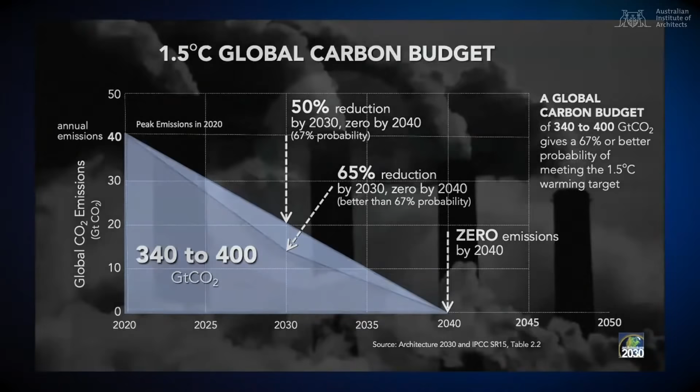And if we want to do even better, we think our sector can do better. Our sector should meet a 65% reduction by 2030 and then phase out all CO2 emissions by 2040. We can do that in the built environment. So how difficult is it to do that? Well, we're calling on all architects, planners, engineers, building sector professionals, industries associated with the building sector and the built environment to design to zero carbon now, not wait.

These are the 3 steps that we can take to get to zero carbon. Step 1, design to the latest code standards or better. We have great codes out there. No matter what code your city or state or country has in place, if it's not up to the latest code standards, it doesn't prevent you from designing to the latest code standards. The code only sets a minimum standard, so you can design to the latest code standard. We'll go over that in a minute.

2, no on-site fossil fuels, design all electrical, and then use renewables for that electricity. And then 3, zero out embodied carbon, specify materials for your building and construction that don't emit carbon. So those are the 3 steps. Let's look at each one individually. First, design to the latest code standards or better.

Again, 100,000 square foot office building. You can see that the latest code standards are so efficient now that we reduce our energy consumption and our emissions in most building types anywhere from 50 to 60, 70%, or even in some cases 80%, if we're using the latest code standards. So this is ASHRAE 90.1 2019, designing to that code standard, and the 2021 IECC.

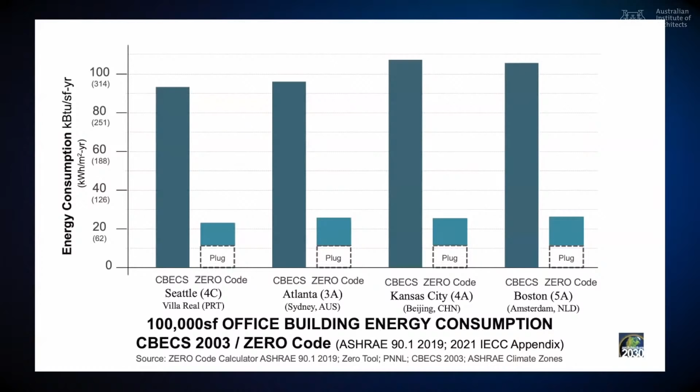And you can see that half of the load in new buildings now is the plug load. The actual code doesn't really get you much in the plug load, but reduces the energy consumption of the building as a whole, the heating, the lighting, the cooling. And you can see that's in the blue bar. There's not much left. We've squeezed as much out of those buildings roughly as we're going to get. We can get 3, 4, 5% more efficient every few years, but that's going to be about it. So our codes are really pretty good.

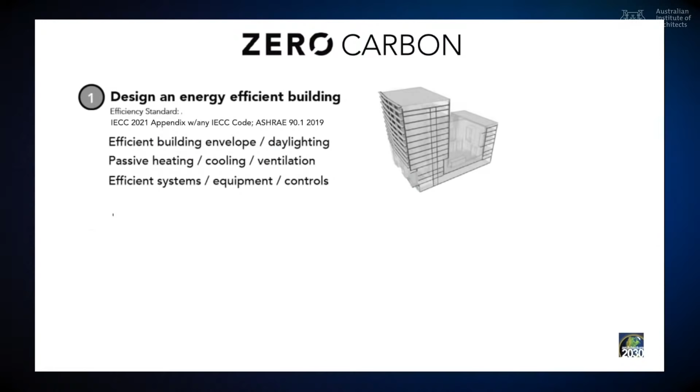So first thing we need to do, design energy efficient buildings. Use the IECC 2021, ASHRAE 90.1, or any code standard that gives you an efficient building. And then you can design beyond that. Design a better envelope, use daylighting strategies, passive heating, cooling, and ventilating, efficient systems and controls. You can get way, way down where a building's energy consumption is very, very small, and most of it then will be just the plug load.

So one was design to the latest code standards for highly efficient buildings. Two, design all electric, no on-site fossil fuels, and then produce that electricity with renewables. So how do we do that?

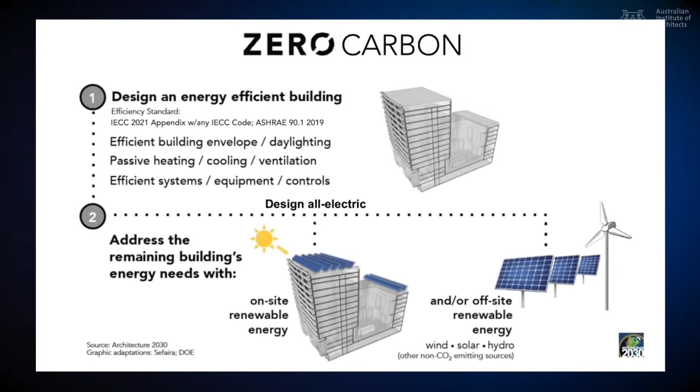One, we design all electric, and then we address the remaining building's energy needs with on-site renewables. And if we can do it on-site, then we're done. Or we do some on-site if we can, and then purchase or procure the rest with off-site new renewable energy, wind, solar, hydro, you name it. That gets us to zero carbon.

And we know, for example, that the city of Sydney is introducing a net zero emission standard, like a zero code, similar to Architecture 2030 zero code, calling for highly efficient buildings by 2023 and achieving net zero output by 2026, meaning that they're achieved through energy efficiency and then site energy generation and offsite renewable energy purchases.

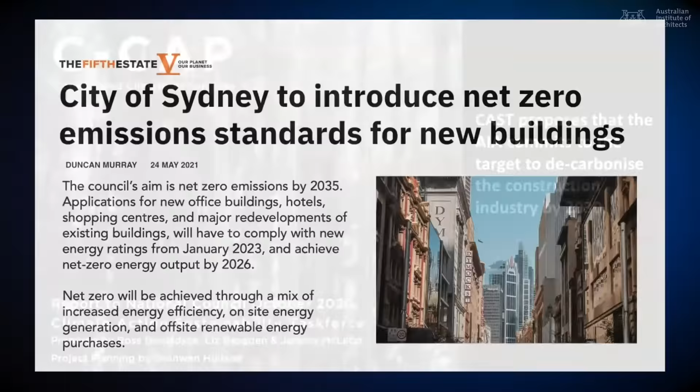And the Climate Action Sustainability Taskforce that was put together proposes that the Australian Institute of Architects commits to a target to decarbonize the entire construction industry by the year 2030. That would be great, and we can do that within our industry with or without government help. Better, obviously, with government help, but we can design to zero carbon standards now.

Well, what about all those existing buildings? That's for new buildings we just talked about. It's the same formula: efficiency, upgrade them for efficiency when you can, electrify them, get rid of the on-site fossil fuels, and then use on-site or off-site renewables to power the building.

And we've discovered something really interesting. This is an aerial view of New York City. You can see those red circles. That's where all the huge buildings, the skyscrapers, the skyline of New York, that's where it is. It's in Midtown, downtown Manhattan, and in downtown Brooklyn. That's where all the very big buildings are.

That's less than 2% of the total buildings in New York City. There's over 1 million buildings in New York, and that's only about 20,000 of them. That small number of buildings is responsible for 48% of all the building emissions in New York City. So a very few buildings are responsible for a huge portion of emissions, and then all the other million buildings are responsible for the rest.

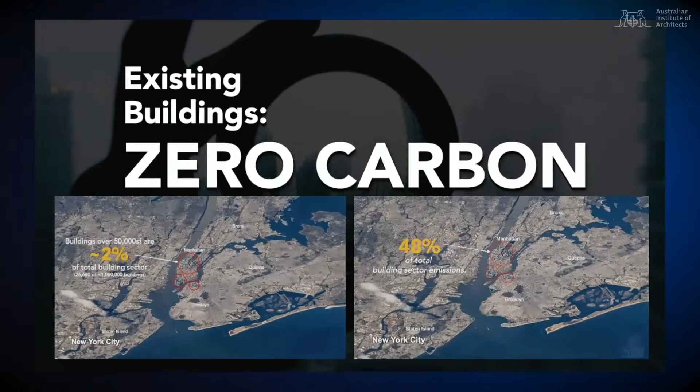So we can develop a policy. We can say, hey, if you have a big building that's responsible for roughly almost half the emissions, it's only going to be a handful of buildings, you get to zero carbon by 2030, and we'll provide some incentives for you to do that. But if you don't, then there's a penalty. Give them low interest loans, tax abatements, all sorts of things that you can do.

And then what about those thousands and millions of other small buildings? You require them to get to zero carbon by 2035 or 2040, and you use intervention points. Small buildings are sold all the time. At point of sale, the new owner coming in has financing, is usually going to renovate. Then he renovates, gets rid of the on-site fossil fuels, uses renewables, and he's at zero carbon.

Well, this is usually the way we see global emissions divvied up. Building operations, which we just talked about, is 28% of all emissions. Then industry is really the belly of the beast. That's 43%. That's all the infrastructure, buildings, substructure, equipment, systems. That's agriculture. That's your computer. That's your sunglasses. That's literally everything that's made goes into industry. And then transportation is 23%.

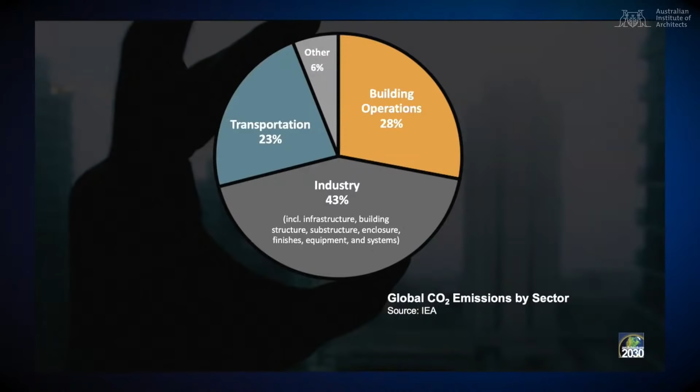So how do we get a handle on industry? All those different products and materials. Well, we discovered something interesting. Two materials, concrete and steel, were responsible for almost half of all industrial emissions. If you throw aluminum into that, then you get over it. But really, concrete and steel are the big two.

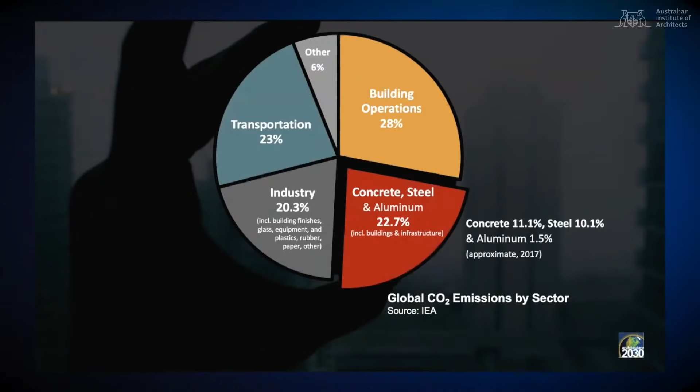So it's almost like big buildings, small buildings. A very small percentage of buildings are responsible for almost half of all emissions. And then you have many, many, many small buildings. The same thing with products. Many, many products, but concrete and steel responsible for almost 50%. So you have to create a two-tier system again to address the industrial sector.

And we can see it in the embodied carbon when we actually build a building. If we're building a large building, almost 2/3, almost 3/4 of the embodied carbon is in the structure, is in the concrete and steel of the structure of the building. And then the rest, the envelope and glass and carpet and everything else, interior walls, are the rest, interiors.

And even in a medium structure, we're over 50%. If we get down to a light wood structure, we're roughly 40 to 50% in the structure. So the structure is the first thing we want to get at, and that's very few materials. Obviously, going to wood is a lot better.

Now, if we can save a building and not tear it down and build a new one, then we're over on the right side, and we're just dealing with renovation and no structure. We save all the structure, so we have a huge savings every time we save a building and renovate it rather than building new. So that's the first option, and then we go to different materials.

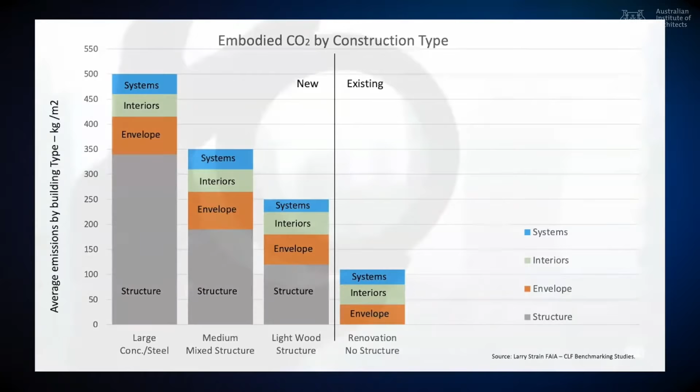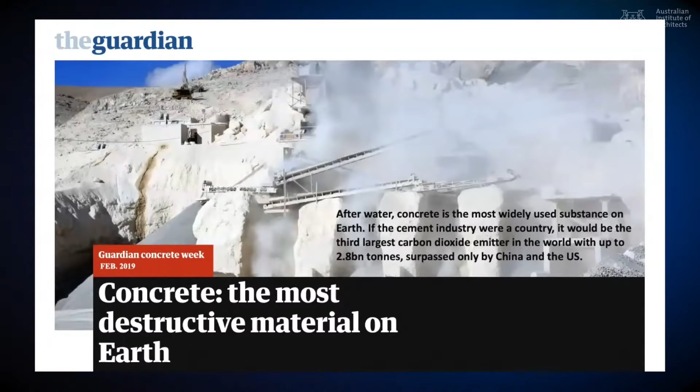So now what do we do? We know the two materials, concrete and steel, and then all the rest. How do we get a handle on all this? Well, the first thing we need to do is change the conversation. And we're now beginning to see that in mainstream media. Concrete, the most destructive material on Earth. You can't do anything unless everyone knows about it. And we're beginning to see that. Steel makers next in the crosshairs as climate pressure grows. And as we see the impacts of climate change, we're going to see huge pressure on those two industries.

And the good news is there's competition. They now have competition, and glue laminated and heavy timber, cross laminated timber is giving concrete and steel a bit of heartburn because it's taking market share away. And if it's done sustainably, from sustainably managed forests, then it can even be a drawdown material.

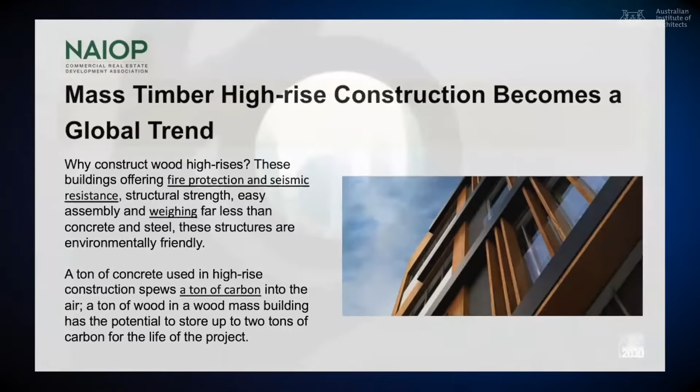So now what can we in our industry do? What can we as architects and planners and designers do? Well, there's three things we can look at. We can reuse, we can reduce, and we can sequester. So let's look at reuse first.

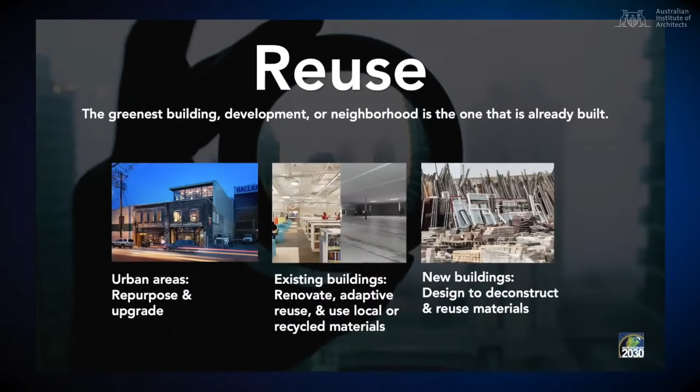Well, obviously the greenest building in a development or neighborhood is one that is already built. So we want to repurpose and upgrade urban areas and renovate existing buildings and use local and recycled materials. When we do that, we save a huge amount of infrastructure and materials. And if we're designing new buildings, we can design them to actually be deconstructed after their useful life so that we can reuse the materials.

Then we can reduce. Well, if we establish growth boundaries and don't keep suburbanizing, we obviously begin to save on infrastructure. We can infill and densify. We know that density is not a COVID spreader, by the way. So we can infill and use all the infrastructure that's in place. That saves us a huge amount of embodied carbon. So infill is another strategy we can use.

We can optimize structure. Right now, we over-structure everything. If we optimize structure, we use less materials. We can specify low to zero carbon materials. We're calling for a 40% reduction now. There are tools available that we can use to actually analyze different life cycle assessments from material manufacturers within the same category and specify the one that has the lowest embodied carbon. And we're beginning now to see public policy address that issue.

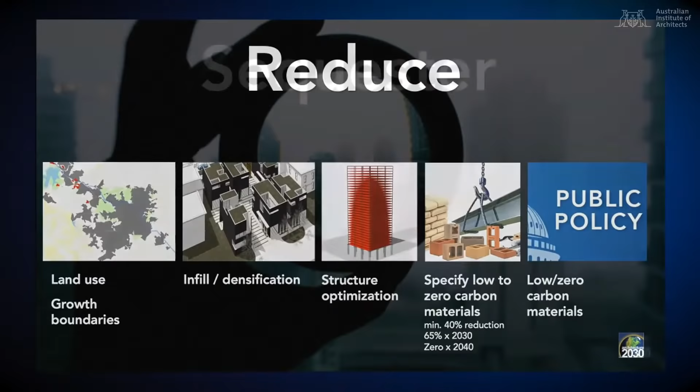Then the third thing we can do is actually sequester carbon in materials by using sustainable and glue laminated wood. We're starting to see sustainable and glue laminated bamboo beginning to be investigated. There's one company now that's actually producing structural members in the global south. So wood, mass timber, comes from the global north. We hope that bamboo then takes off in the global south because it's very fast growing. It can be harvested very quickly. It's a grass, and it'll take in a lot of carbon.

We're now looking at carbon positive aggregate. We have a company actually making it now and expanding, where they're actually taking CO2 and making aggregate out of it and turning it into aggregate for concrete. We're looking at injecting CO2 into concrete and changing its properties, strengthening it, shortening the time it cures. There's all sorts of benefits to doing that.

And we're seeing now companies sprout up all across the country and around the world that do this. And now we're looking at full cycle plants where we take the CO2 from making the cement and then inject it into the concrete. So it's a zero carbon material. Using biomaterials that actually embody carbon and then encapsulating that in buildings. And if we use renewable energy to actually make those biomaterials, then they become actually carbon sequestering materials.

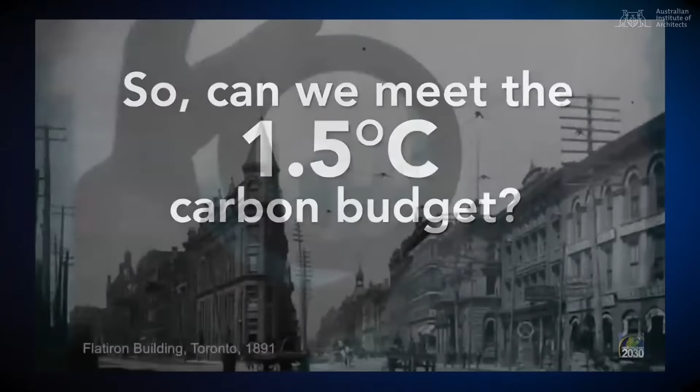And landscape and soil and urban agriculture, bringing urban agriculture into cities, so we reduce the transportation costs, and using landscapes to actually draw down CO2. So there's all sorts of strategies that we can use. So can we meet the 1.5 degrees C? Can we meet that carbon budget, 50 to 65% by 2030, and phase out all CO2 emissions by 2040? Well, let's take a look at history and see what we have done in the past.

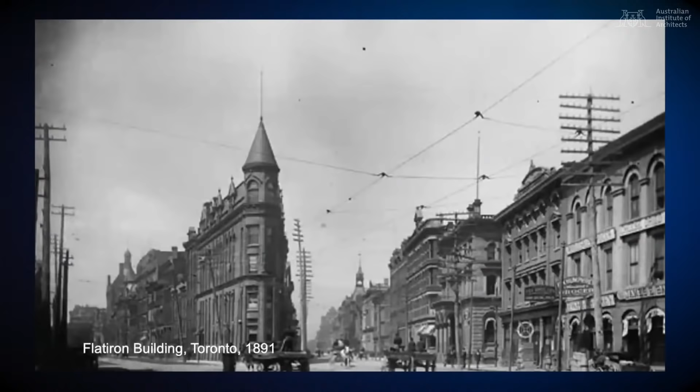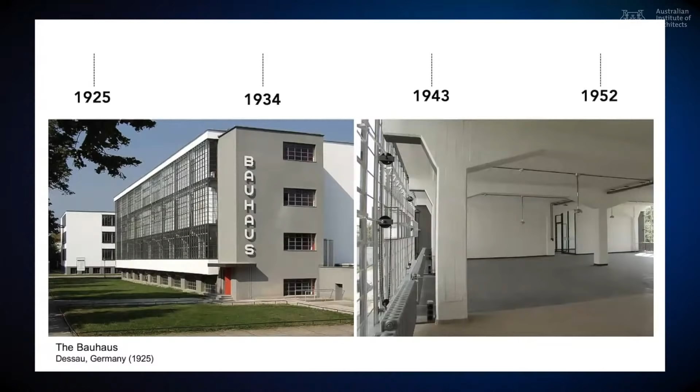Well, the first modern building was in 1925. This is considered the first modern building, where structure moved inside the building, no more bearing walls. So you had point loads with columns and beams. You opened up the floor plan. You can see it went from wall to wall, from one side of the building to the other. And then you hung the building off the structure. You can make it all glass, big horizontal windows, connect to the outside. Incredible. So we used reinforced concrete here. When steel came along, we were using steel. So this is considered the first modern building.

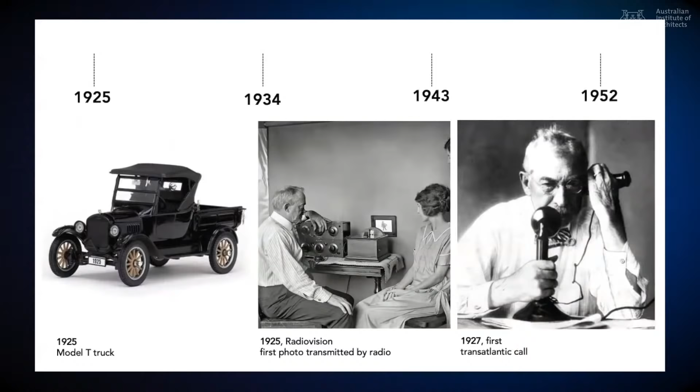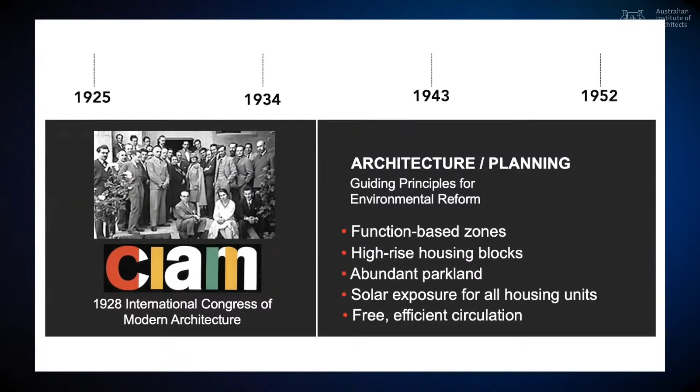That was 1925. So what was going on in 1925? Well, it's pretty primitive. We didn't even have television. The first Model T truck came in, and we didn't make the first transatlantic call till 1927. So things were pretty primitive back then. In 1928, conditions were so bad in Europe that the most influential architects and planners got together and held the first International Congress of Modern Architecture. And they set up a whole set of guidelines. Get the housing out of these industrial areas. People were dying at a very early age, emphysema and lung conditions. There was soot everywhere. Conditions were really terrible.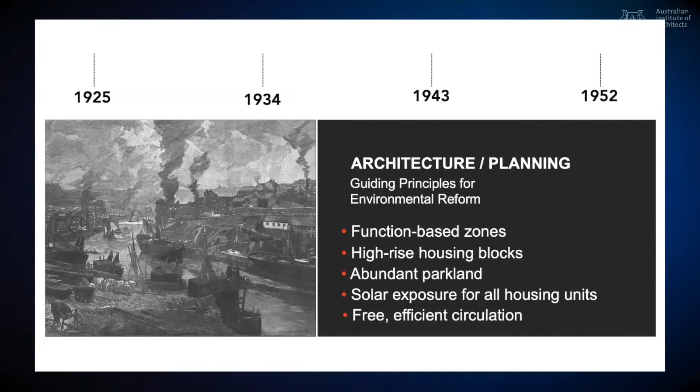They called for function-based zones. That's zoning today. They called for high-rise housing blocks with lots of exposure to sunlight. Put them in parks, rather than in these polluted areas. Solar exposure so that you got heat and light free, free heating, for example, in Northern Europe. And they called for free, efficient circulation. So those were the planning principles, and they laid out the architecture principles, Le Corbusier's 5 points. Column wall separation, so you freed up the design of the facade. Now you can have lots of glass, horizontal windows, inside out connection, freed up the design of the plan. You can put the walls anywhere. And it was interesting. They called for any land that you took up on the ground plane to be put back on the roof.

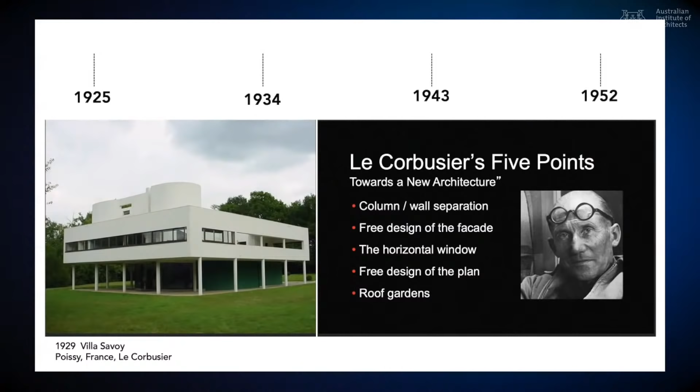We're starting to see that happen now. Didn't take off then, but those were the guidelines that were set out to change the world. That was in 1928. By 1932, in the US, we called it an international style. We could take the principles from the modern movement in Europe and apply them in the US. We can apply them anywhere in the world. Because why? We can condition that interior space now.

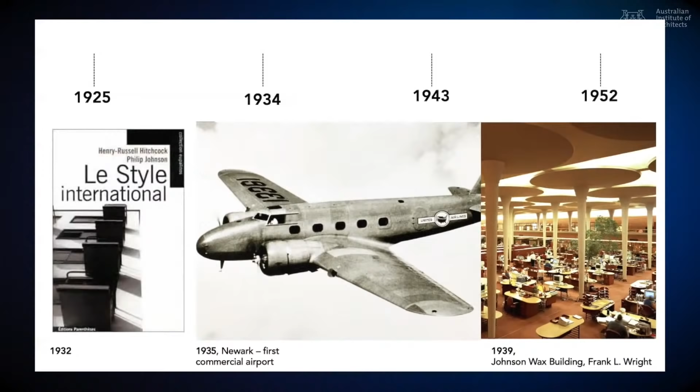Energy was so cheap. So what was going on in 1932? Well, we didn't even have a commercial airport in the US at that time. That didn't happen until 1935. By 1939, we had the beautiful Johnson Wax building with point loads, for example, columns, and big open floor space, huge. So that was '39.

By 1949, you had the Glass House by Philip Johnson. That's a single glass, all glass house, metal and glass in New Canaan, Connecticut, which is a cold northern climate. By '52, you had the beautiful Lever House, which was again a single glass building hung off the structure. We could climate control anything. And by '56, you had Brasilia, an entire city planned on the modern principles.

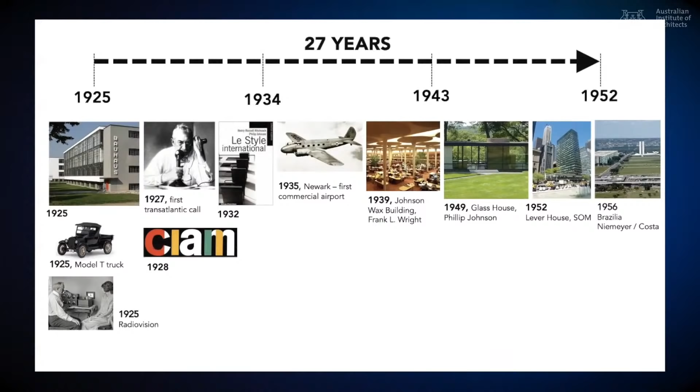So how long did that transition take? Well, from 1925, from the Bauhaus to the Lever House, 1952, was 27 years. We changed the world in 27 years using these design tools. We didn't have an ink pen. We had two prongs that we dipped in an inkwell, and then did our drawings with a T-square and triangle, and ink would get under the T-square. We didn't have erasers. We had a razor blade, and we'd scrape off the ink.

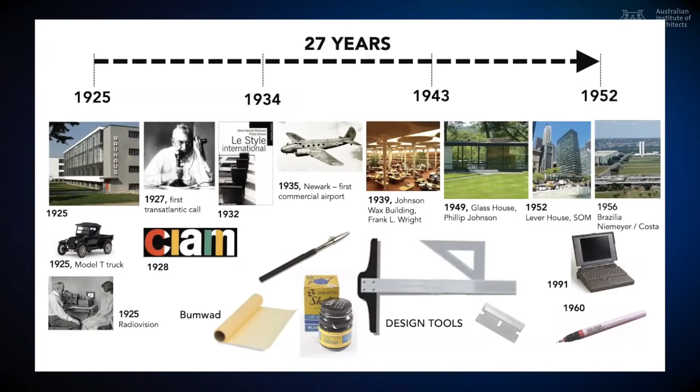It would take a year, two years to do a set of construction documents. We couldn't do a curve, because you actually couldn't build it, because you couldn't dimension it in the construction document. We didn't have computers back then. We had slide rules. We changed the world in 27 years with these fairly primitive, by today's standard, design tools. We didn't even get an ink pen until 1960, and we didn't have the first laptop until 1991. So think what we did in 27 years, and think what we have now.

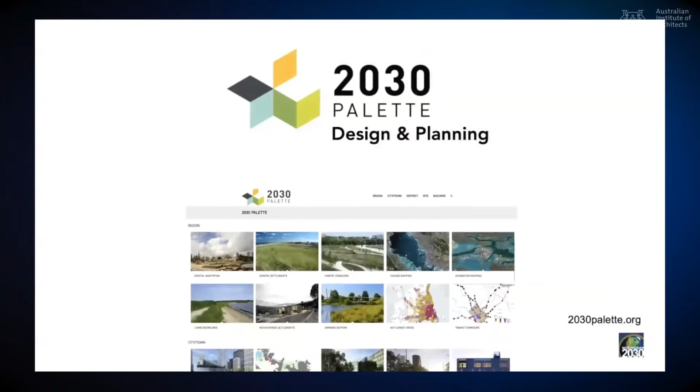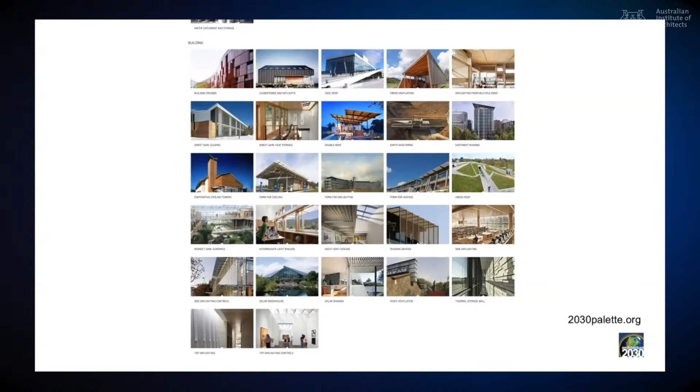We have the 2030 Palette, for example, at 2030palette.org. It has all the strategies that you need, the rules of thumb and the guidelines for developing zero carbon and even carbon positive and sustainable built environment, and dealing with some of the impacts. This is upgraded every year and will be upgraded heavily this year now that we know what many of the impacts are.

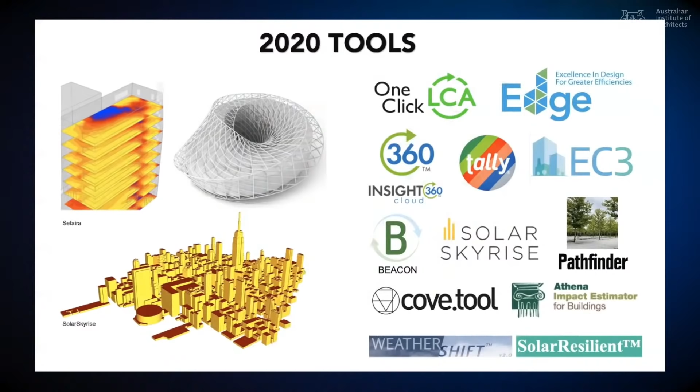You have all these tools that are out there, simulation tools, structural tools, daylighting tools. We can look at everything. You have EC3, which is looking at different materials and giving the embodied carbon of many, many different companies so that you can select the lowest one. You have Solar Skyrise. We can look at entire cities. We have incredible tools now to design to very, very low carbon or zero carbon standards.

And now solar. This was last year in October. Solar became the cheapest electricity in history, confirmed by the International Energy Agency. So renewables now are much cheaper than fossil fuels. So do we have any examples out there of going to zero carbon? And how far have we gotten from 2005?

Well, this is the United States building sector, every building in the United States. This was in 2005, and I'm going to now forward it to 2020 and see what the emissions are. Between 2005 and 2020, we've added about 60 billion square feet to our building sector. A huge amount of building has been done in that period, and the building sector has grown. But look at greenhouse gas emissions. In the US building sector, we're down 30% from 2005 levels, and that's today. That's actually in 2020, last year.

And how did we do that? Because every time we keep adding buildings, we keep using more energy, and emissions have been going up. That has been historical from the Industrial Revolution until 2005. Every time we built a building, energy consumption in the sector went up and emissions went up. In 2005, somehow that all changed.

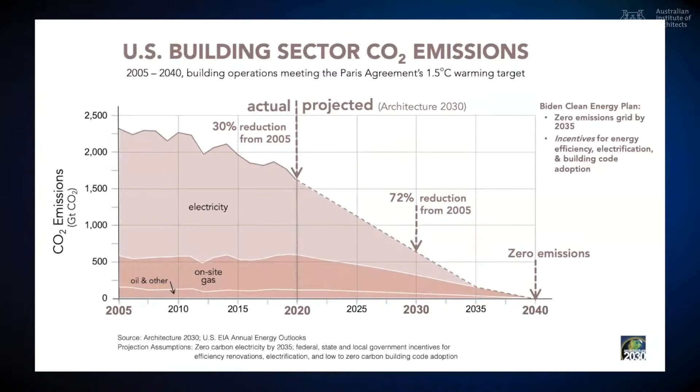The administration wants to have a fully clean grid by 2035 and provide other incentives for building electrification, adopting better codes and all that. If they make good on the clean grid by 2035 and put in place a few other things, we should be in the US down 72% from 2005 levels in our emissions and easily phase out all CO2 emissions in the entire building sector in the US by the year 2040.

And we're asking all countries to increase their ambition to 50 to 65% by 2030, zero by 2040 in the upcoming COP that's taking place in the UK in Glasgow in a few weeks. We're asking them to commit to these reduction targets, and we will show them the way.

We know how to do this in the built environment. It's the largest energy and emissions sector in the world, and we're committed to doing this. And we're asking the countries to commit also. We will have a communique that will deliver to the conference.

And that communique is signed by over 60 of the largest architecture and planning firms in the world, and most of the professional organizations, including the American Institute of Architects, the International Union of Architects, the UIA, and the Australian Institute of Architects, along with many, many others. And many are signing on as we speak. So this list is only going to grow.

It's a substantial document. I'm not too sure how many people will have read it, but it really does make the point again, and goes under a kind of banner of Code Red for Humanity. So I'm not sure how much more you could say to get the attention on the topic and the subject. And the material contained within there relates quite strongly to one of my favourite sources of information around the science, and that's the Potsdam Institute, and the terrific work of people like Will Steffen, who's at ANU in this country, and Johan Rockström

in Europe. And therein we see stories about the Earth warming 170 times faster than it has for 7,000 years. And we're approaching that 2-degree tipping point. Of course, we now talk about 1.5, and part of the reason for that is that 2 degrees might be too high and too late. It might actually be a tipping point where the Earth tips from a self-cooling to a self-heating system, and then who knows what will happen after that.

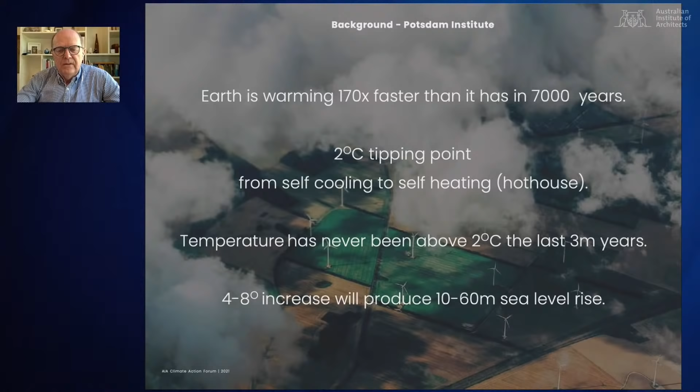And it's important to realise that the temperature's never been above pre-industrial periods by 2 degrees in the last 3 million years. That's a mind-blowing statistic for me. And once we get into the higher numbers, in the 4 to 8 degrees, if we don't take action, then we could be producing sea level rises between 10 and 60 metres if the Antarctic and Greenland ice caps melt. Now, that's an extreme scenario, and let's hope we go nowhere near that.

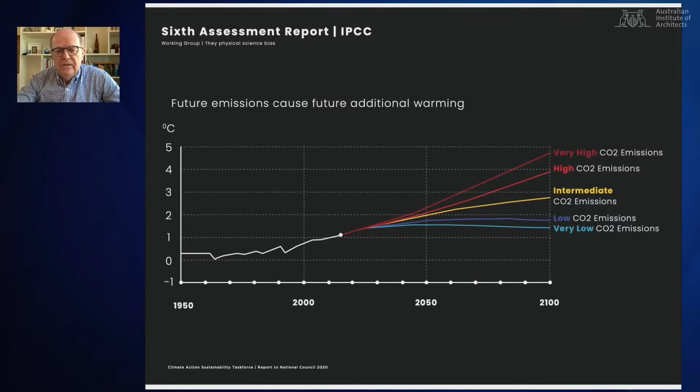So this is the kind of key graph, isn't it? This shows a range of trajectories depending on what actions we take. From taking no action at the top, producing very high CO2 emissions that will take us into that territory of potential risk of 5 degrees temperature increase, to the blue line, which shows if we really do get rapidly onto it, there's actually a potential to lower some of the temperature increases we've been experiencing.

So climate change and biodiversity loss is the most urgent problem of our time, and our built environment accounts for nearly 40% of that. So we've got plenty we can contribute as people in the building industry and architects practicing the design of buildings. So climate change is a result of breakdowns in the carbon cycle caused by us. It's a design failure. And I think we as the architectural profession really need to own responsibility for that.

And we believe the work of CAST and the way we formulated this story is that if we want to succeed with that aspiration of 2030, we have to approach it on a campaign basis. We have to formulate a campaign to actually define a pathway to get there. We can't just describe aspirations for points of arrival and targets. We need a pathway. We need a plan.

So we've approached it on the basis that architects often work with project plans to ensure buildings get delivered within certain parameters and on time and budget and so forth. And we've set up 3 work streams to do this work within CAST, one focusing on education, one on tools and benchmarks, and one on the advocacy work, which is obviously one of the major exercises.

Now, I've got quite a bit of content here, quite detailed. I'm not expecting anybody to read it. I'm going to skim across the top just to give a sense that we really do have a plan. And the detail of that is really what's ultimately important, but not for today. So those 3 work streams I just mentioned, and this is the kind of detail we've taken that to, and those in the architectural fraternity will recognise this as something that looks like a project plan for a project.

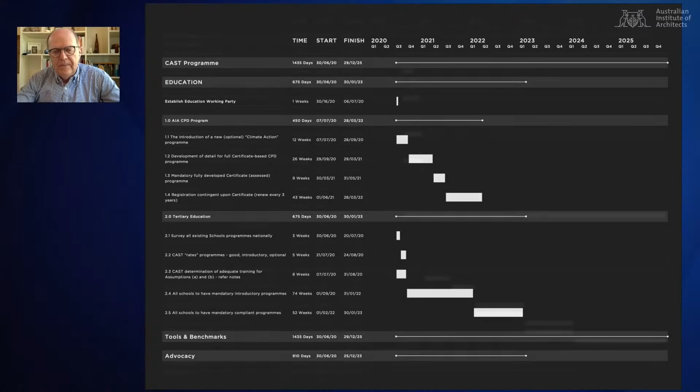We have a series of tasks, start dates, completion dates. Ultimately, you put a resource plan on this, of course, in terms of how to deliver it. But it's a series of actions that takes us along a journey to that 2030 target. And each step is a relatively simple one. Each task is relatively clearly defined. Once you break down to simple tasks, then it's much easier to think about how you approach those tasks and really treat it as a clearly defined campaign.

Now, this one I wanted to extract because this is the urgent work that CAST is focusing on in this next period. We need to get an Australian standard written to become the focus point for all of those involved, all the stakeholders in the construction industry to be pointing to.

The local government authorities, the approvals people point to this target of this standard, and we can all be getting around a common platform and moving forward and avoiding the risk, which I think is currently apparent, that we all might go off in a very disaggregated way, which would be then very hard to be sure of what the outcome would be.

So we get that standard in place in June 2022, and then we start the work of working around the codes and the certifiers and state and federal government departments who need to be involved to get on side, and the local government councils who ultimately approve building applications, and reach a point by the end of 2025 where we have the standard in place as a mandatory framework. And then we've got 5 years from then to 2030 to ensure that all work and projects that are delivered in that period achieve the 2030 target of being zero carbon.

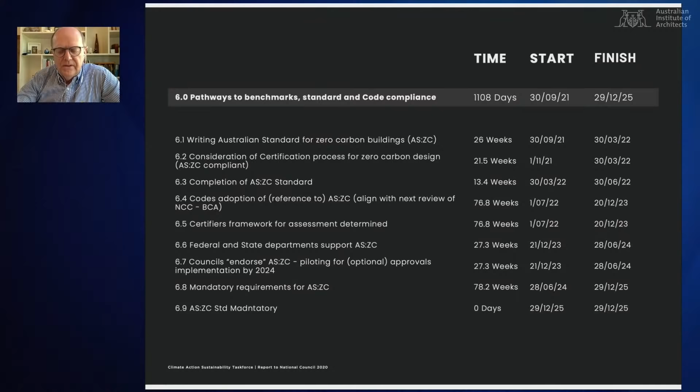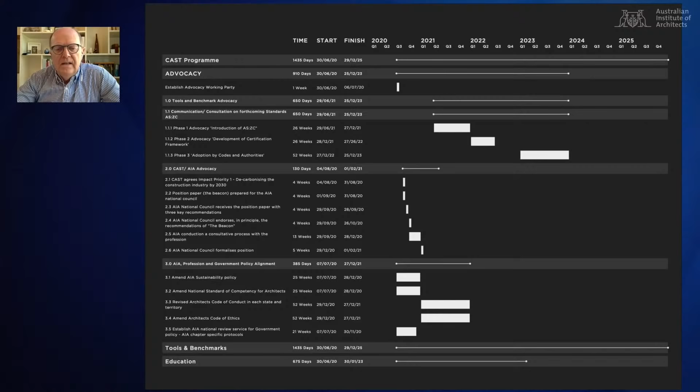And then one of the fundamental aspects of that is advocacy. These things won't happen without a lot of people talking to each other in a very coordinated and clearly targeted way, and helping people along the way to understand what they can do to contribute to this journey. So advocacy is a really very, very important part of this plan.

And National Council, to their credit, adopted this plan in November at their National Council meeting last year, and set us on the pathway of starting to implement it, which is no small task. I'm certainly not underestimating the magnitude of the challenge, but I think once you break down a complex challenge into small, definable, manageable tasks and get them enacted in the right sequence with the right resources, with the right communication amongst all the stakeholders, it's certainly not beyond the realms of reality.

And we have to approach it on the basis that this is a realistic aspiration, a realistic target, and that we have to be working together. Getting everybody working together, of course, is one of the big challenges, because there's lots and lots of good people all around the country doing great work, not necessarily in a particularly coordinated way. And of course, there are a lot of others who aren't yet on the pathway and aren't yet believers that a 2030 target is realistic.

So since then, the AIA itself has become carbon neutral in its operations. That was done very quickly with the assistance of Jerry McLeod, one of my wonderful collaborators. And there's been a national campaign rolled out, guiding practices around the country to become carbon neutral in their own operations. What's the term? Walking the walk, talking the talk. Obviously, architects need to show the leadership. If we can justify taking a position of leadership in this, we have to substantiate it through our own actions.

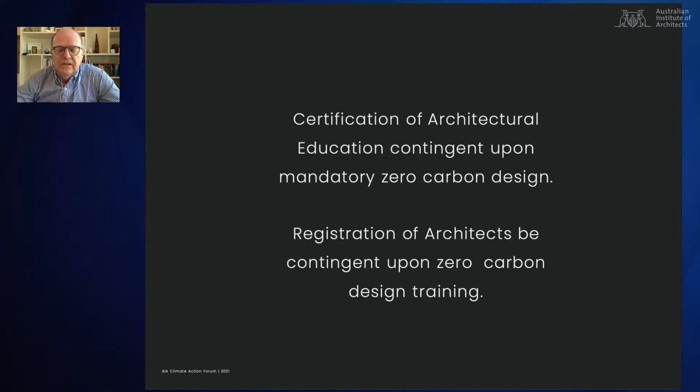It now requires that all education institutes that contribute to the training of architects, to maintain their certification as providers for architectural training, must themselves be teaching zero carbon design as a mandatory part of their programs. And indeed, and this is another big move forward, the ongoing registration of architects must itself be contingent upon participating in certified zero carbon design training along the way. So this involves a very significant re-engineering of architectural practice in this country. It is a significant journey in itself, but we've really made a great step forward in this, and hopefully we can bring everybody along on that journey too.

In addition, last year we put together some continuing professional development courses in zero carbon design as pilots to test and start the process of the training that needs to go into it. And as I mentioned earlier, we've now started the development of the process for the Australian Standard Framework, which will be the focus for all development approvals requiring ideally a whole of life carbon understanding of buildings, not just operational,

but also embodied. And we see that the pathway to that 2030 is that the thresholds for approvals in terms of the carbon performance of buildings will be a bar that is raised incrementally during that period. We can't start in 25 expecting that things are already zero carbon. We have to understand that this is itself a journey and has all sorts of pragmatic considerations to helping the whole industry move along that journey, and we would see, as I say, the bars for approvals being raised steadily as we traverse that journey.

And the CAST report, which I've been talking to extracts of, is forming the basis of a submission to the RIBA forum that's leading into COP26 later in the year. So to play our role, the AIA is currently recruiting resources to assist in this very important advocacy work. It's not to be underestimated the amount of work it takes to play our role to help move this along towards that 2030 target.

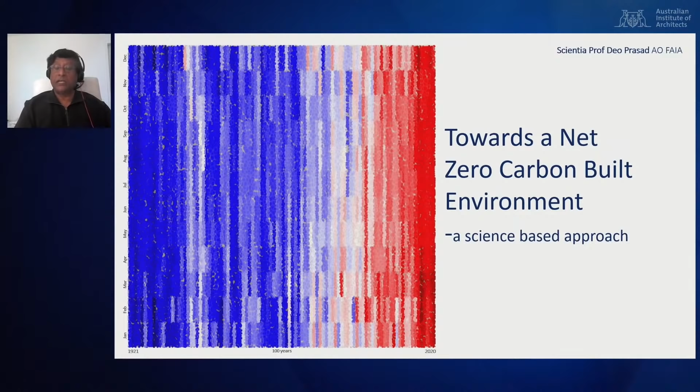Ross has presented the CAST agenda, and I will go on and describe some parts of it in a bit more detail, looking at how we navigate towards low carbon in a more effective way, knowing Australian climate, Australian practices, and so forth. So we all know that we are addressing a broader set of issues in design, sustainability goals, which is much more extensive. The case for carbon reduction has been made quite clearly by earlier speakers, and by many reports internationally. So I will not go into that, but just to say that we are now focusing much more on climate emergency, how quickly we can navigate the building sector down towards net zero carbon.

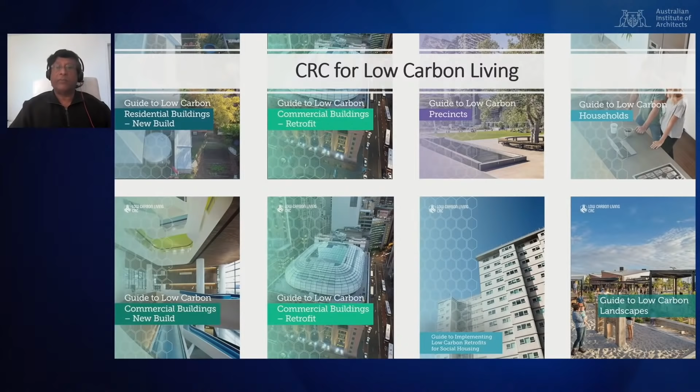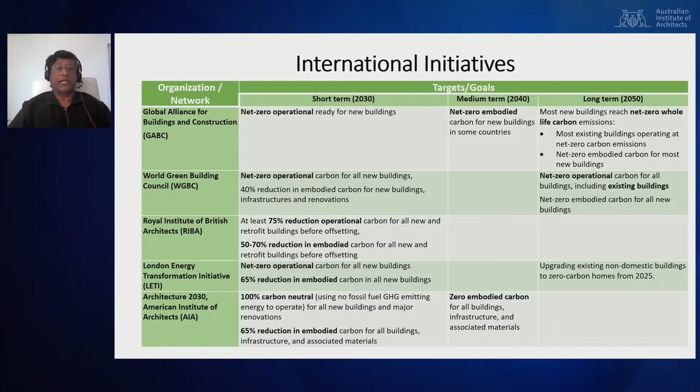A lot of material is available. The CRC for Low Carbon Living over the years has produced lots of guides to low carbon precinct design, planning, buildings, retrofits, and these are all available freely on the CRC website if you Google it. In addition to that, there's also a lot of work being done internationally that you are all aware of, and Ed and Ross would have alluded to them, from the Global Alliance for Buildings and Construction to the World Green Building Council, Royal Institute of British Architects, LETI, and the American Institute of Architects. A lot of work's being done, and there is a lot of precedent to pick up upon.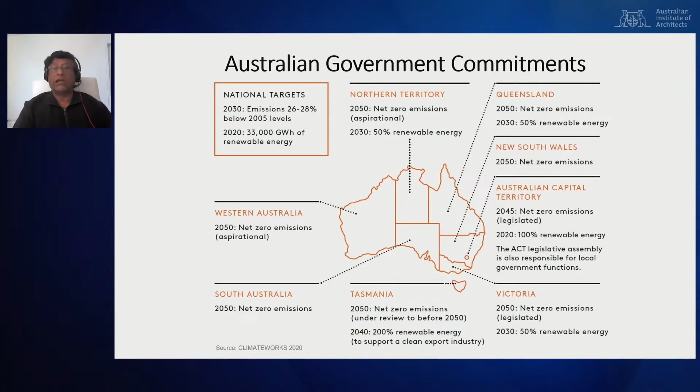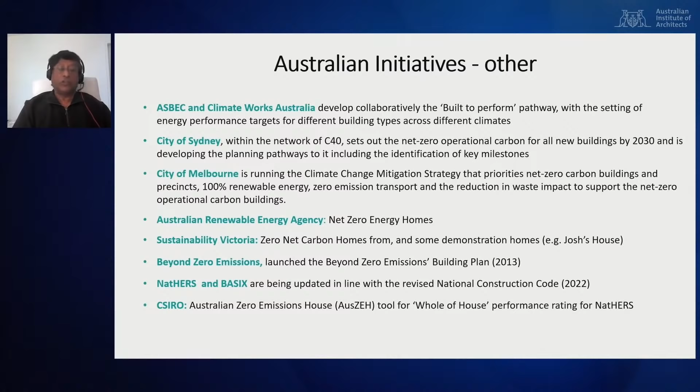In Australia, the Australian government has set itself a target of 26 to 28% reduction compared to 2005 levels. These are slightly old targets and not much has been done more recently, but each state and territory has its own aspirations about carbon reduction, which range from 50% renewables by 2030 to much more intensive and detailed approaches by some of the state and territory governments. A number of organizations, the Green Building Council, the Construction Code, have all also produced documents. So for you as practitioners in architecture, there is a lot of available information, even down to City of Sydney, City of Melbourne, and Beyond Zero, among others. So there is no lack of guidance in how we navigate towards net zero.

In this research that we have been conducting, we are looking at a more holistic approach, a whole of life carbon approach, where we look at both operational carbon and embedded carbon, because we need to tackle both to bring the building sector down to net zero, as has been said earlier. In this, we are trying to start with the early stages, as you see in the diagram, product stage, construction stage, use stage, and end of life stage.

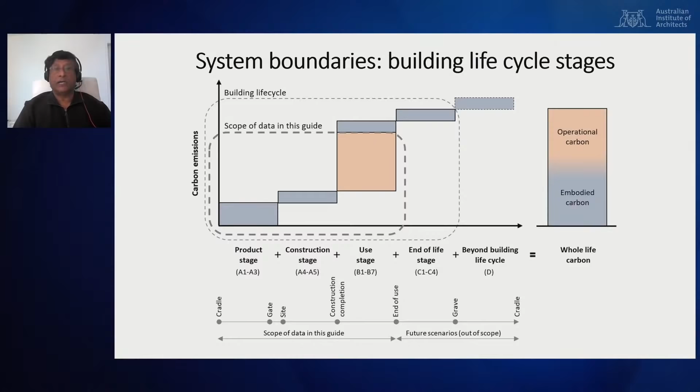Beyond life, we are not looking at it here because we're trying to get people on board, especially on embodied carbon, to become good practitioners in this area rather than simply complicated by too much data and tools that become difficult to navigate. The strategies for net zero are very clear, as you see.

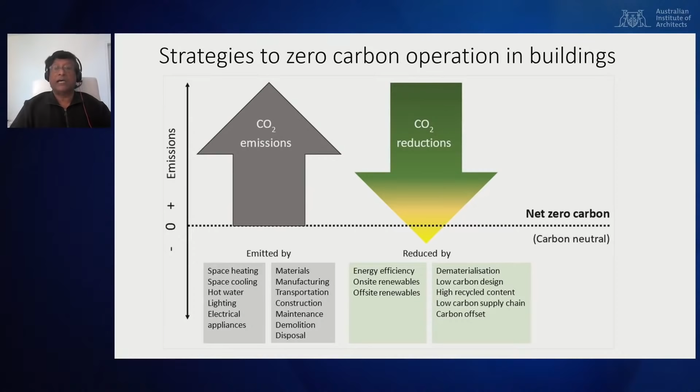In designing and building, we create emissions by services we provide and by materials we pick. The goal is to reduce it, to not only offset that but more than that, so that we can actually move towards a better climate and future. So in trying to navigate that, different partners have different approaches.

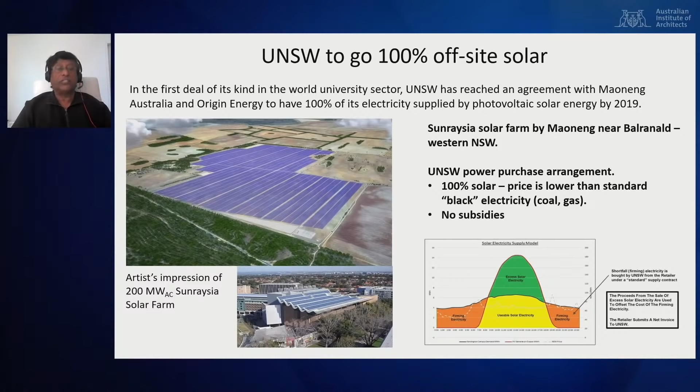My university has looked at a solar farm, for example, to offset all its energy use using photovoltaics. As you see in the diagram below, the daytime use offsets the base load at night. The building you see here is where more than 50% of world IP in photovoltaics that's on the roofs at the moment came from. Just look up the father of photovoltaics, Professor Martin Green, and you will see what he has achieved.

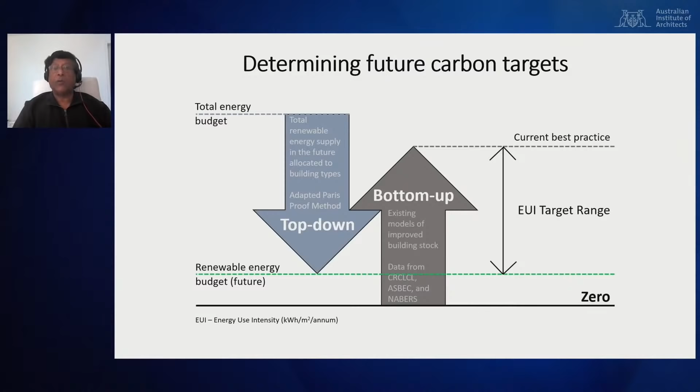So in developing methodologies for Australia, we looked at the top-down method, the Paris-proof method, and the bottom-up approach, which is looking at all the data, tools and models we have available, and come to a gap between current best practice and the energy budget, so that we can target an energy use intensity range which would be practical given how we build and design buildings. This information in detail will be available; within 10 minutes I have to fit just the outline.

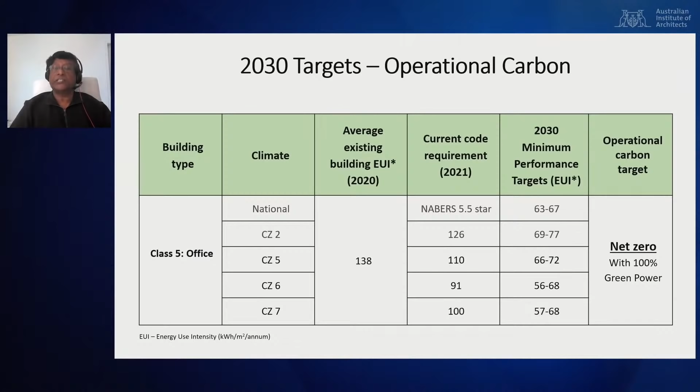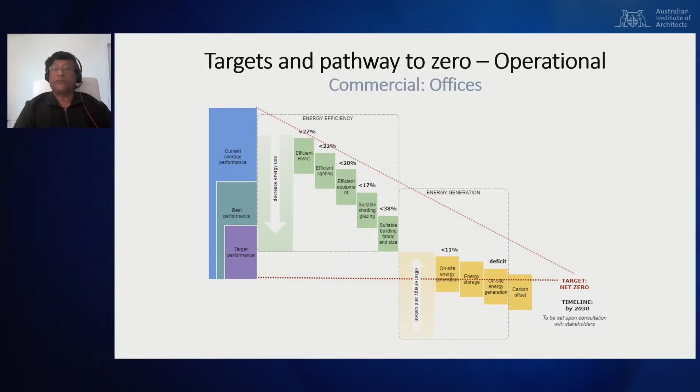In terms of targets and pathways, COAG has current average performance of buildings in blue on the left, and then best practice of NABERS. We are trying to improve on that from a science-based approach, target performance, and navigate to zero. It is much easier going from best practice towards net zero, using on-site and offsets through renewable energy. So there are a lot of opportunities, even on embodied energy.

The COAG data shows about 3,937 kilograms of carbon equivalent per meter squared net lettable area at the moment in the stock. But using percent reductions on the graph, we can reduce it to 2,362 by 2025 in the building stock. By 2030 we will go much further down, and 2040 is clearly achievable for net zero. However, for most buildings you could do it much sooner, before 2030, and only the ones that you can't drag on to 2040.

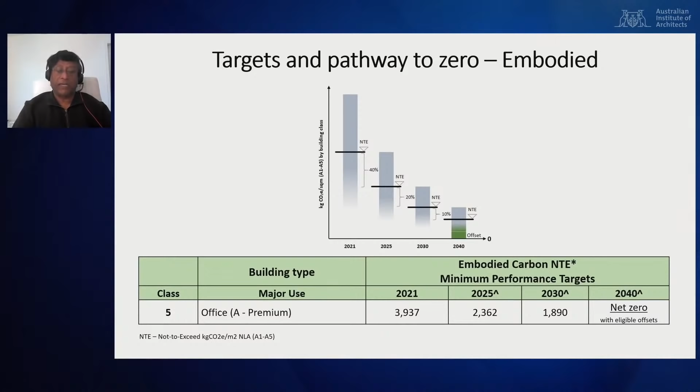So this is possible. With renewable energy offsets, there are issues with trying to offset using renewables when you can do more on site. However, different client systems may wish to use renewable energy in a big way so that it's largely in the grid, and as a result it makes it easier for us to navigate that.

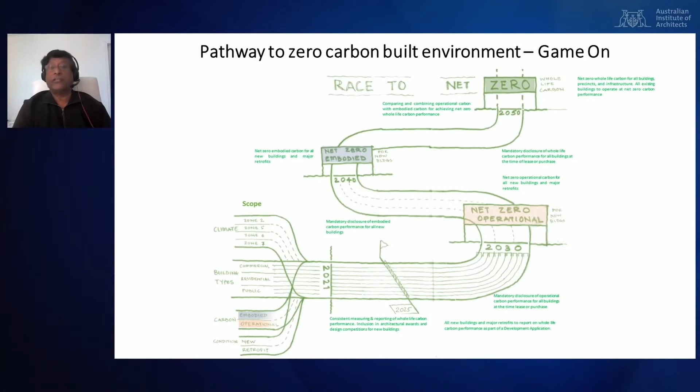So looking at the challenges, we have set up a track: by 2021, which is now, we can start on this challenge. By 2025 we have significant achievement in having the tools, data sets and standards right, and by 2030 we can certainly deliver operational net zero for the building stock, and for many buildings embodied carbon as well. By 2040 we should get the other ones into the mix, and we can deliver net zero buildings in Australia, given our climates and all the different types of buildings, locations, and how we build across the range.

So thank you. All of this information is going to be put into a guide, available widely and freely through the CAST group's work, and we hope we can help you navigate to net zero embodied and operational carbon effectively. There is the need for a good conversation between the client and the architect, to make sure you have common agreement on when and how, because there are costs involved.

It's like a commitment agreement that NABERS has, but in this case these are much more one-on-one conversations with clients that might lead to an agreement on how we navigate over what time you want to go net zero. And these would be essential pieces of going through the design process and delivering.

A book on the same subject, which will be much larger, more than 250 pages, for deeper reading, would be available by December, and Springer is bringing that out later in the year. But the guide is produced locally and it will be freely available. So all the best. We think we can do net zero buildings by 2030 in most cases. Where they go astray, we can do it certainly by 2035 to 2040. Thank you.

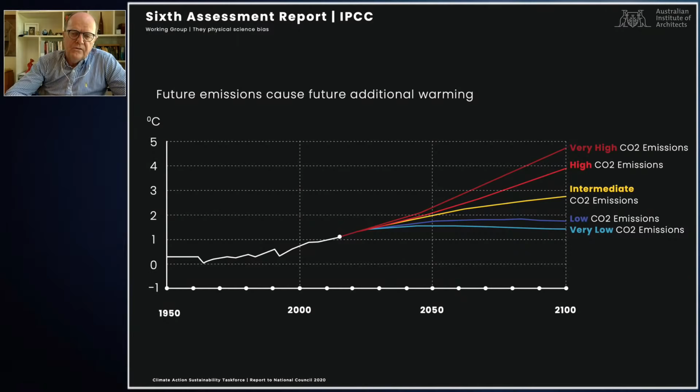So we just can't contemplate that, and we've got a great opportunity to get down to keeping to 1.5, lowering the temperature back to 1.3 by the end of the century, and start healing things. And I think the trajectory is achievable once you focus on it. And I think there's been plenty said today about how to get there.

Yeah. So essentially, if we hit it hard now, we can really make a positive difference. The longer we leave it, the more difficult it's going to become. It's a good segue. Yeah.

So Daya, that's a good segue, because in fact, what you've done is you've tried to untangle this plethora of targets, guides, and tools that many don't know where to start from, and actually reduce it to first principles, analyze it, look at the empirical evidence, and put together not only a very technical guide for an academic audience, but a very simple guide for practitioners who really want to come on this journey. And so we'll be welcoming that in October.

But you show that it's possible to get to net zero buildings in Australia by 2030, which is good to know for both operational carbon and maybe slower for embodied carbon. This sounds really good, but what's needed to happen to get there? Thank you, Helen.

Thanks, Helen. As I showed, we are beginning to take a whole of life approach, and we need to, because there is carbon across the life of the building. And at the same time, we have split them into operational carbon and embodied carbon. So operational carbon, it is possible, not too difficult to show that we can drive it down by 2030. The cost of renewable energy is coming down so much.